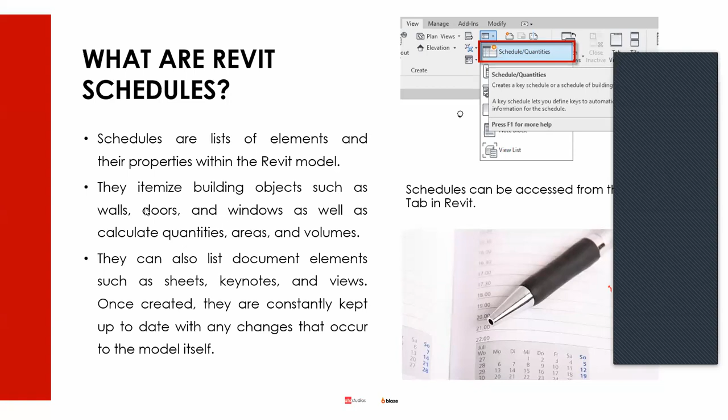So it's a bidirectional software, meaning that whatever you update anywhere, even if you update something on your schedule, it will update on your floor plan, on your elevation and all that. So that's basically the way schedules work in Revit. So basically in Revit, all building elements have information about their properties defined within the model. You also have the option to include additional information with any element.

So for example, by the time we start creating schedules, you notice that there are some parameters that you want to include in your schedule, but they don't come automatically within Revit. Revit allows you to create new parameters and add to your schedule. So that kind of makes it flexible. You can expand the parameters you have.

For example, let's say you want to generate the quantities of doors in a building, and then you want to indicate which of those doors have security features in them, which of them allow you to come in using biometric or access control and all those things. Such kind of parameters are not natively available in Revit, but with that feature of allowing you to create new parameters, you can easily add as many parameters as you want, and we'll look at all that by the time we start doing the practical.

So for example, doors have properties like size, material, fire rating, cost, and so on. All this information can be scheduled and quantified, and you can even add more to it. So when it comes to Revit, by the time we start the practical, you'll see that there are 6 major types of schedules in Revit, and each of them are tailored towards different use cases or purposes. The most popular and the most common one is what's called schedule and quantities.

And this is the most used schedule type in Revit, and it allows you to list and quantify all element category types. So you will use this to create your tabular views of doors, walls, quantities, areas, rooms, and so on. So basically, like the name suggests, schedule and quantities focuses on the quantity of elements. So for example, you want to find out how many doors you have in the building, how many windows you have in the building, those things. Of course, you can add more parameters, but the focus of this first type of schedule in Revit is on the quantities of elements.

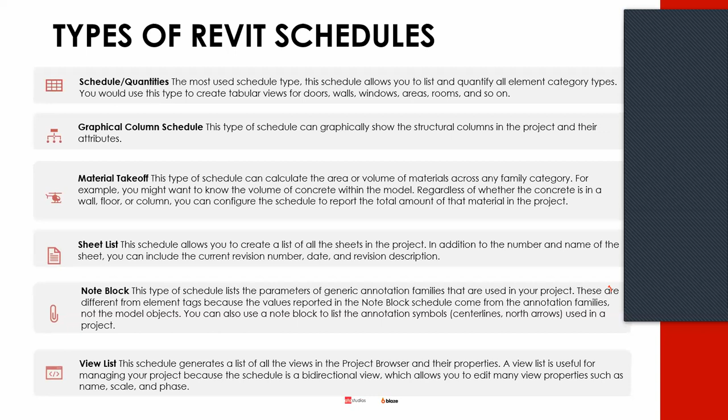So these are basically the types of schedules you find in Revit, and depending on what you want to itemize or schedule, you choose the type that you want to start with. And then each of the schedule types in Revit gives you the ability to select the related element properties that you can mix and match to track elements within the model.

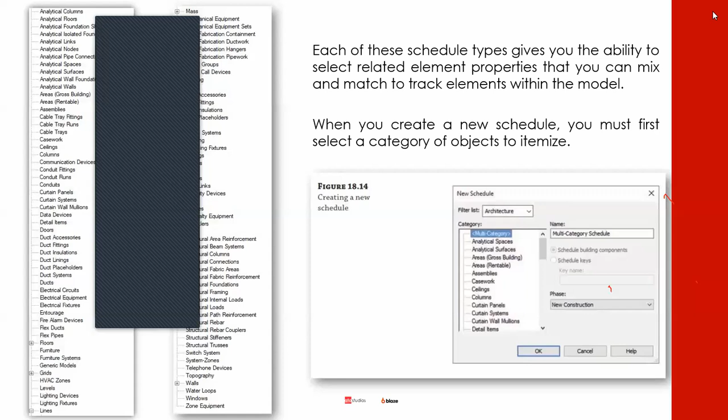So when you create a new schedule, you must first of all select the category. So basically, Revit has different categories of elements. A wall is a different category from a window in Revit. A window is different from a floor or a roof. So when you want to create a schedule in Revit, the first thing you have to decide is what category you choose. That category is what determines the parameters that you see subsequently.

So once you've chosen the category, you now start the actual scheduling, which presents you with different tabs depending on the type of schedule that you choose. I will explain all this in detail when I move into Revit, but you see different tabs. The first one is fields. This is where you select all the parameters that you want to add to your schedule.

The next one is filter. This allows you to filter out elements. For example, I want to generate a schedule showing all the doors on the first floor of a building. I can generate a schedule, filter by floor, and filter out all those doors that are not on the first floor, for example. And then you have the sorting and grouping. This is where you decide how you want to arrange, sort and group together those parameters in your schedule.

And then you have the formatting. Formatting is basically where you also decide how the schedule will look. For example, is it going to be aligned to the left or to the right? Do you want to rename some of the headers? Do you want to show the total and all those things?

Which I will still look at in detail when I move into Revit. And they also have the appearance, which is basically the graphical appearance of your schedule. What kind of font do you want to use for your text? What kind of line width do you want to use, and all those things? So those are basically the major tabs.

Then depending on the schedule type as well, if you are creating some special schedule like a room schedule, you also see one more tab called embedded schedule. This allows you to embed a schedule into another schedule. For example, you can create a room schedule and embed a furniture schedule inside it, and that will show you the furniture arrangements room by room across your project.

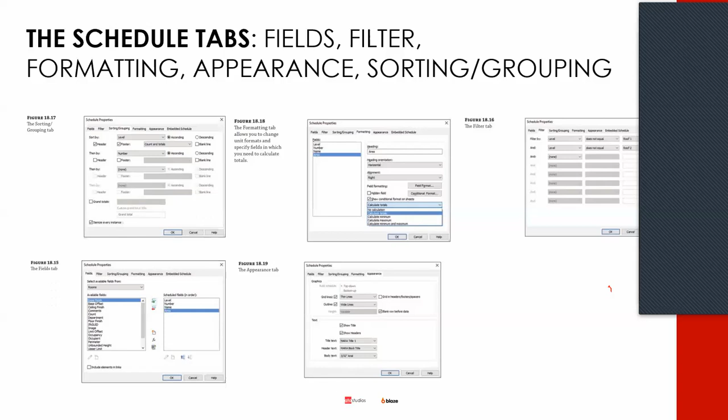So that's the embedded schedule, but this is only applicable to very few categories like rooms and spaces, things that you can embed geometric elements into. So those are the various tabs you find within a Revit schedule. And then finally, you also have what's called a multi-category schedule.

Like I mentioned earlier, before you start your schedule, you need to choose a category, which can be door, wall, window, column, casework. But there are some instances where you want one schedule to account for multiple categories of elements. Let's say you are procuring multiple categories of elements from the same manufacturer: your doors, your windows, your furniture, and your plumbing fittings. And you want to create a schedule showing all the elements you are procuring from that manufacturer.

In a case like that, you need to account for multiple categories of elements in the same schedule. That's where multi-category schedule comes in. When you want to create a schedule, that's usually the first option you see before the other categories. This type of schedule allows you to account for multiple categories, but the parameters you can add are much more limited because the same parameter needs to be available across all those different categories.

For example, every category in Revit has some parameters like keynotes, manufacturer, identity data, and so many of those kinds of things. Those are the kind of information that you can add to a multi-category schedule. And then you can even create more parameters to also add to it. But when I start demonstrating, you'll see some of these things.

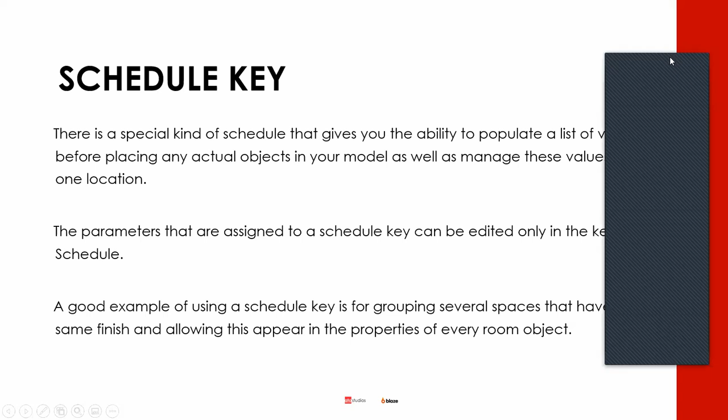And then you also have what's called a schedule key, which is a special kind of schedule that gives you the ability to populate a list of values before placing any actual objects in your model, as well as manage these values. People hardly use this. People that use this are mostly MEP engineers. For example, you want to control one schedule using another schedule. It actually takes some advanced Revit knowledge to make use of, but it's also one of the schedules you can generate in Revit.

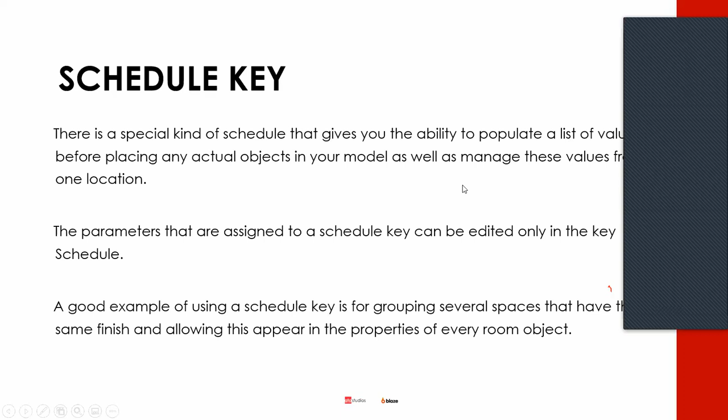And then, like I mentioned earlier, we have the embedded schedule. Embedded schedule basically allows you to embed a schedule into another one. For example, you can create a room schedule and embed furniture, or your doors and windows, to show how they are distributed across the spaces or rooms in a project. So that's basically what embedded schedule does.

That tab is only available when you create a room or space schedule, like I mentioned, and the embedded schedule tab allows you to associate another schedule of elements. The primary use of the embedded schedule is to create a schedule for spaces and associate elements from MEP-based systems, such as ducts, piping systems, electrical systems. Well, architects can also use it to show their furniture arrangements across their spaces and rooms.

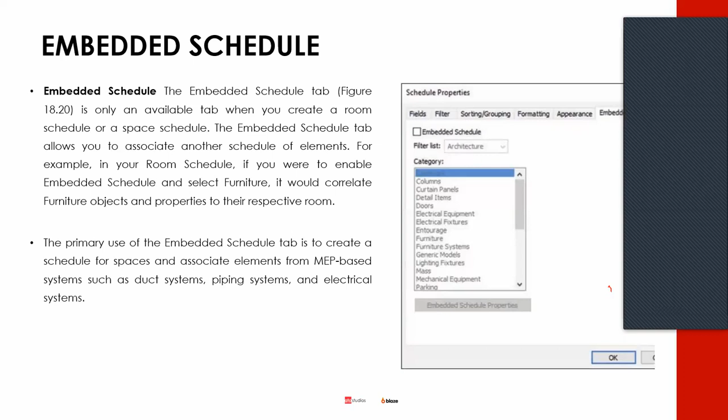And you also have what's called a legend. This is not really a schedule, but sometimes if you cannot show something properly using a schedule in Revit, you can use a legend. A legend is much more manual than a schedule. You're basically dragging elements and then typing.

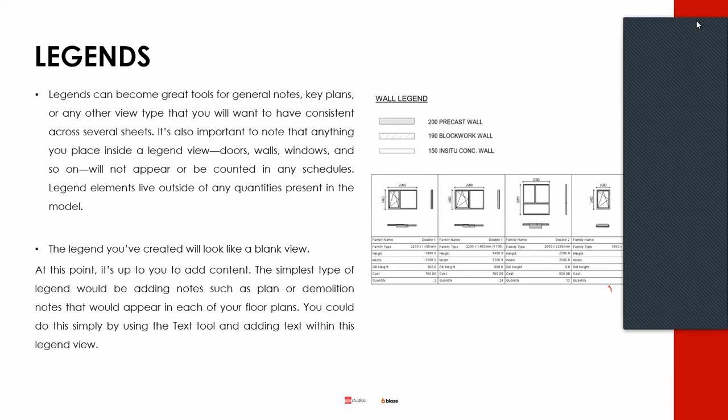For example, architects, in most of their documentation, usually show their door legend or window legend, showing the different types of doors and windows they have. This kind of presentation that you see here is done using a legend. It looks a bit similar to a schedule, but it's much more manual. A schedule is automatically updated, but for a legend, most of it you have to type as text.

So if there are some things you want to achieve that are not achievable using a schedule, then a legend becomes an alternative. For example, with MEP, M&E engineers, most times if you look at the documentation, the first thing you see is a legend showing all the icons, all the symbols and what they represent, all the switches, the sockets, the ducts and whatnot. Those kinds of things you can easily do in Revit using a legend.

And of course, one last thing about schedules in Revit is the fact that you can reuse them. Once you've created a schedule for one project, you can easily copy it across your projects. What that does is that it will bring in all the properties of that schedule into a new project, but the quantities that you're seeing will come from the project, while the properties will come from wherever you

copied it from. So once you've finalized and perfected one schedule in a project, you can easily copy it and replicate. It will just bring in all the settings you've done, because some of those settings can take time to create. So it just serves as a template that you can easily copy and paste in different projects.

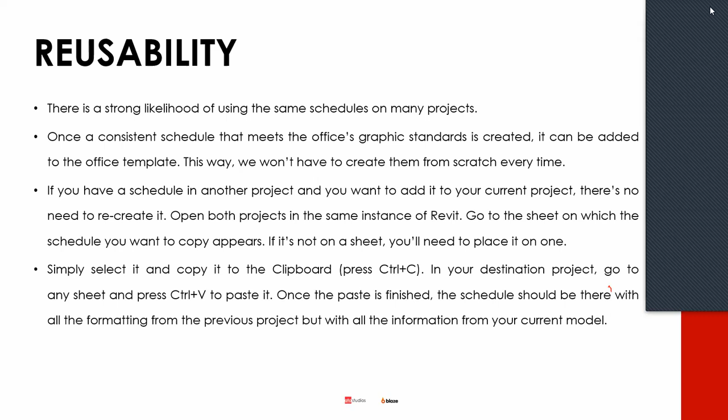So at this point, I'll just go into Revit and begin to show some of these things.

So, I believe you can see my screen. Can you see my screen? Yes, we can see it. The basic sample project. Yes. Okay, fine. Yes, they can see it. Yes, they can see it. So I understand. Okay, so

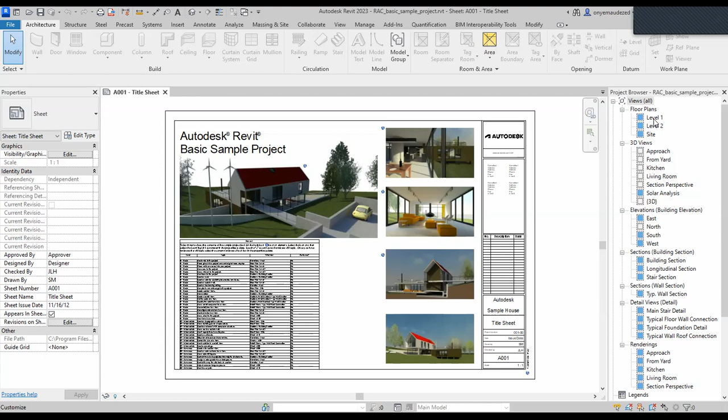before I go into the actual schedule, I'll just quickly run through the Revit interface. I'm using Revit 2023, which is the latest version of Revit that they just released last month or thereabouts. So when you launch Revit, even before you open a project, the first thing you see is your home page. From here, you will see your recent projects and your recent families.

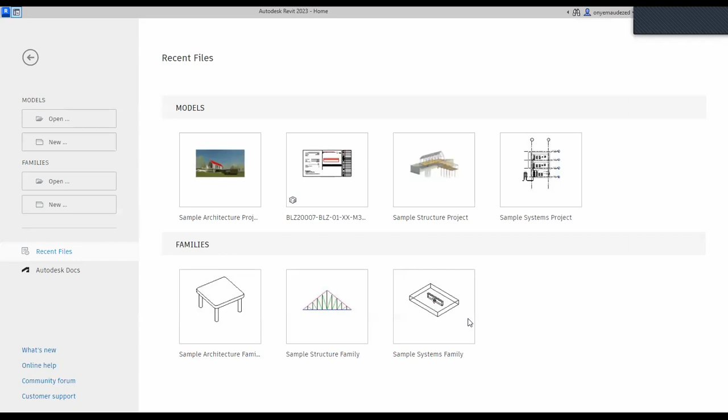So when it comes to Revit, there's something called families and something called projects. A project is comprised of multiple families. For example, all the components you bring into your project, like doors and windows, are called component families. They are created outside of the project, and then you bring them into your project. So this is where you see all the recent families that you've worked on, and this is where you see your recent projects.

You can open an existing project or create a new one. You can open an existing family or create a new one. And then if you have the license, Autodesk Docs basically allows you to collaborate with other people on the project remotely without having to be in the same location. So that's what Autodesk Docs here is for.

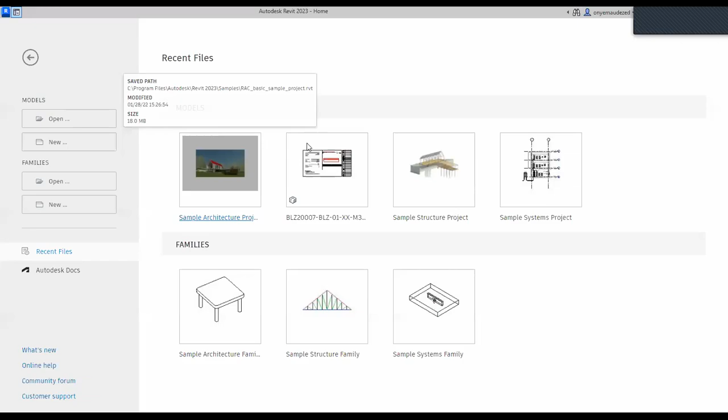So when you open a project, you now have this very busy looking interface. I'll just summarize this. At the top here is what you call your quick access toolbar. This is where you see the tools used very frequently. You can add or remove them. If you click on this drop down, you can check and uncheck, or click on customize to customize more things. And if you want to add a tool, you can right click on any tool on what's called the ribbon, and add it to your quick access toolbar. So that's the first thing that you find here.

Below it, you have what's called your ribbon. The ribbon is broken down into different tabs, and the tabs are broken down into what's called panels. Each panel is a collection of similar tools. For example, we have the architecture tab, which is where architects spend most of their time. Under the architecture tab, you have the build panel, the circulation panel, the model panel, and the room and area panel. The build panel is where you see all the tools you use to design a building. That's why it's called a build panel.

So that's basically a tab. They have the architecture tab for architects. You have the structure tab for structural engineers, with the panels under it. You have the steel tab for people that are into steel fabrication, and the precast tab; these three tabs are mostly for structural engineers. And you have the systems tab for M&E engineers. So you can see,

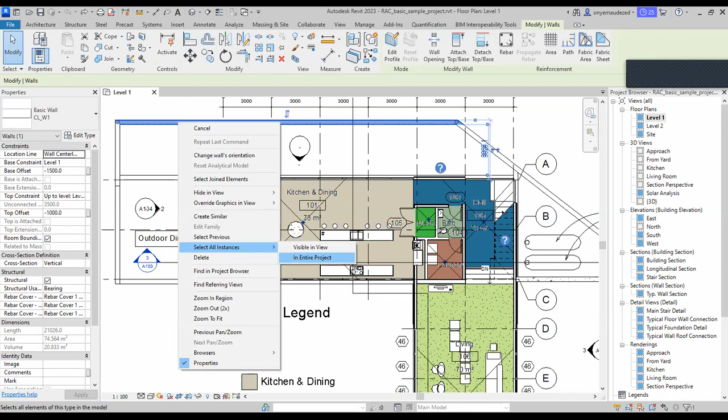That's the wall type, right? So if I click on this one and I say select all the instances in the entire project, if you check the count of this, you see that I have 6 of it in this project. If you check filter, you see that I have 6 of this. So now if I click on this one and I change anything from here, this will affect only this particular instance of this wall. And that's why it's called instance property.

But by the time I click on edit type, which you see beside this, whatever you're changing from here now is called type properties. So because I have 6 instances of this wall in the project, anything I change here will affect the 6 of them. In fact, if I add more later, it automatically affects it as long as you can see the type CL_W1. I can even switch to a different type from here, but whatever I'm changing here affects the entire type. So if you have 100 instances of the elements in your project, it will affect all of them.

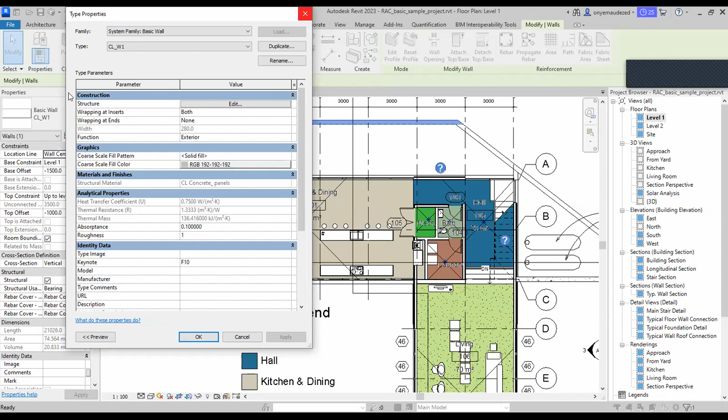So those 3 things are what make up your property browser. You have the type selector, you have the instance properties, and you have the type properties. And then another important panel you see is your project browser. Just see this as in your Windows, just like your file explorer. This is basically where you find all the view types in Revit.

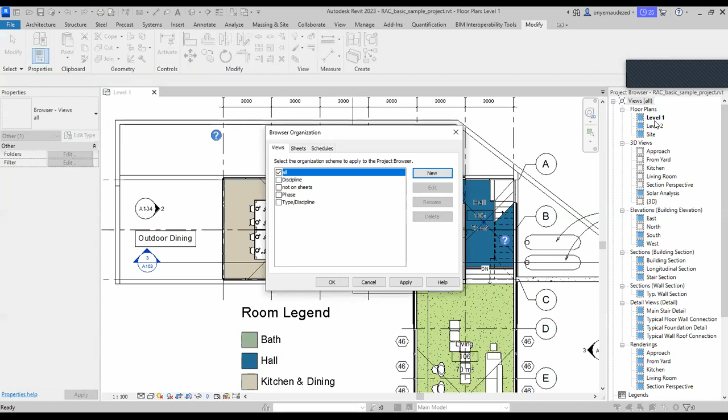So depending on how it's arranged, you can see under here that the view type is views in bracket all. So if I click on browser organization, which is kind of advanced, you see that you can arrange by discipline, you can arrange by phase, you can arrange by type, and then by discipline. But this default one is usually okay. So from here now, you can see that I have floor plans. You can see all the floor plan views I have. I have 3D views.

And then recently in Revit, these ones in blue, they just added this feature in 2023. These ones in blue tell you that they're already placed on the sheet. So the ones that are not highlighted in blue means that they're not placed on a sheet yet.

So basically, these are all the 3D views I have. These are all the elevation views I have. These are all the section views. You can see that even the sections have different types: building section, wall section, and all that. If you go back to your view type and want to create a section, you can choose the type of section you want to create, but that's a bit advanced. But basically, you can see all the section types you have.

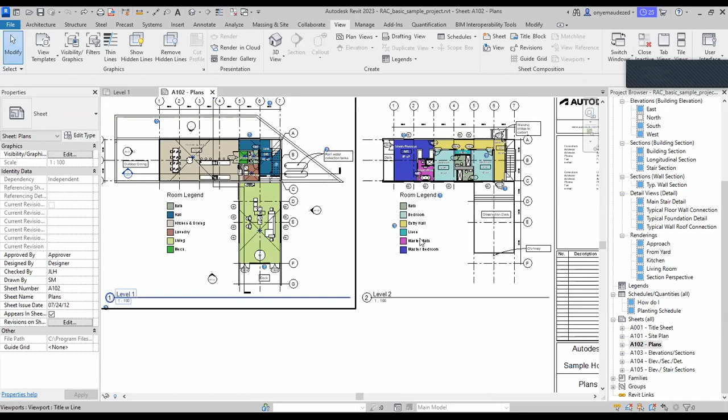You can see your detailed views, even your rendered views. If I click on this now, you can see renderings have been done on this. So all those view types are arranged under the project browser. And then you can see the legends, the schedules, the sheets. For example, if I click on these plans, you see that these are multiple views. This is your ground floor and the first floor plan. These are two views that have been placed on a sheet, which is why I was differentiating.

So if you are creating a sheet list, it will be listing all the sheets you have on the project. But if you are creating a view list, it will be listing out all the views you have on your project. These views in blue are the ones that have been placed on a sheet. If you want to print this out for a project site, I'll be printing out the sheets and not the views, because these have been scaled down.

If I click on this view now, you see that the scale is 1 to 100. I can change the scale from here to something else. If I put it to scale 1 to 200, you see that it automatically resizes on the sheet, right? So that's basically how the sheets and the views work in Revit. All those things are arranged under the project browser. You can see all the sheets and the families.

Earlier I mentioned that a project is comprised of multiple families. When you expand the families, you begin to see all the kinds of families, the categories, which is very important. When you want to create a schedule, you need to choose what category you want to start with. For example, you can see doors. If I expand these doors, you see all the door types that I have in this project. So this is a category called door. Under the door, you have types.

So all these things are arranged under your project browser, under the family tree. If you are familiar with Navisworks, you know that Navisworks also has a similar thing called family tree. That's where all those categories you see in Navisworks are able to belong to the right category, because Revit has already placed them under the right category. And that's the beauty of BIM software.

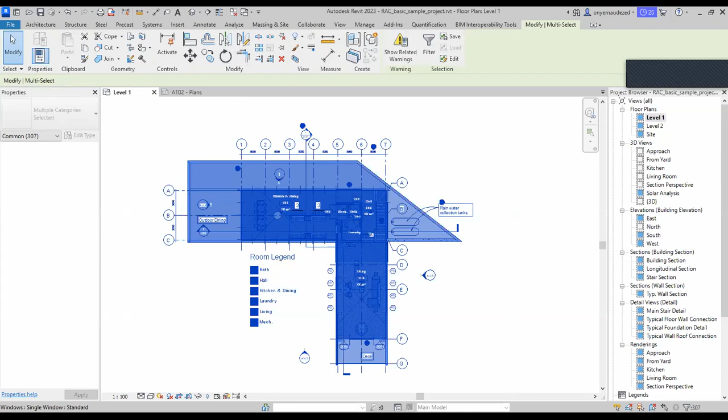And they also have this final element that looks like a funnel. So when you select multiple things, it will tell you the amount of things I've selected. So you see that just by highlighting over my screen now, I've selected 307 elements. So this funnel just gives you the number. But if you now want to find out the breakdown, you also see another funnel that is up here.

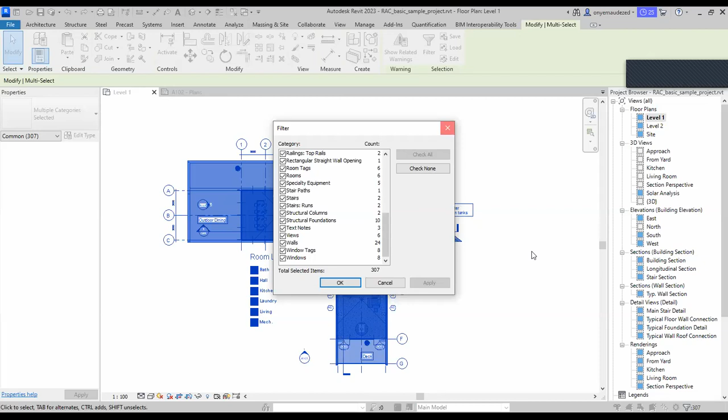If you now click on this one, which is the filter, it will now break down what you selected. So just by scrolling over my screen now, I've selected room separation lines, 4 of them, 2 casework, color fill legend, and all. You can see the way it's all broken down. And by the time you add it up, it gives you 307 elements. So those are just the basic summary of the Revit interface.

One last thing here, up here too, is where you manage your license and all that. So for example, because I didn't connect to internet before I opened my Revit, and I've not opened my Revit for the past 5 days, it's already counting down. Even though I'm using a genuine license, if you don't connect to internet, automatically it will place you in a 30 days trial. So once I connect to internet before opening Revit, this countdown will disappear.

But this is basically where you can change your account. If I go to here, you can see my account details and I can change my license and all that. And they also have the App Store where you can download some plugins and whatnot. So that's basically the summary of the Revit interface.

So at this point now, I'll go into the Revit schedule proper. So for you to create schedules in Revit, from the ribbon, you go to the View tab. The View tab is where you create different types of views. And interestingly, a schedule is just another view type in Revit. The same way you look at your project through a floor plan, which is graphical, or an elevation or 3D, a schedule is just another way to look at it.

This time around, you're looking at it in a tabular view, so the same things you're seeing here are the same things you have on your schedule. And which is why I mentioned earlier that Revit is bidirectional. Anything you change on the floor plan will also change on the schedule. Anything you change on the schedule will update on the floor plan. So to Revit, it's just another view type. Which is why if you go to the View tab under the Create panel, you see it beside all these plans.

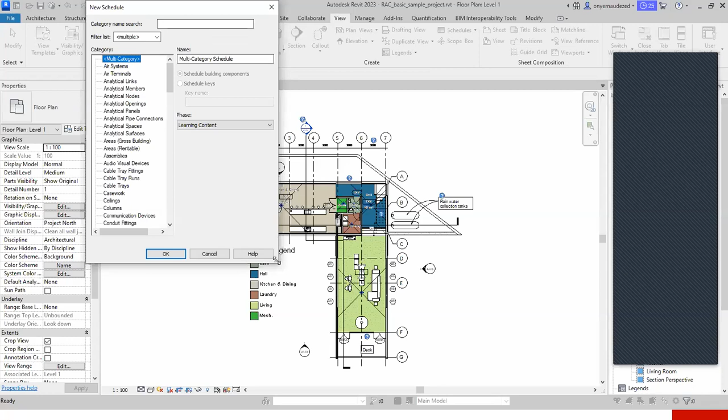Once you click on that, you now see this New Schedule dialog on the screen. This is basically where you choose the category. Depending on the discipline, you can filter by discipline. Since the wall is an architectural element, or I'm not interested in M&E elements for now, I can uncheck these ones to reduce the categories so that I don't have to scroll too much. As I'm unchecking, you see that it's reducing. So I can reduce it to just architecture. I don't have infrastructure here. So this is now just architectural categories, and you can see that architecture alone has so many categories.

Now, what I want to create is a wall schedule, so I have to look for Walls. I also need to be careful, because if you click on this plus sign, you have Wall Sweep under it. If you click Wall Sweep, that means you're just calculating the sweeps that you have on your wall and not the actual wall. So make sure that you click on Walls. You can also see the multi-category schedule I mentioned, which is the first one here. I'll show that if time permits later.

Once you've chosen the category, you also need to look at these things here. Since there's no wall schedule yet in this project, the name will automatically use the category and add schedule after it. If you have one existing before, it might become Wall Schedule 2. But if you want to rename it, you can rename it from here.

And then you also have these 2 options, schedule building components or schedule keys. In the introduction I also mentioned schedule keys. Most times the people that use this are electrical engineers. It allows you to control a different schedule using the properties from this schedule. So it's kind of advanced. So make sure that you choose schedule building components.

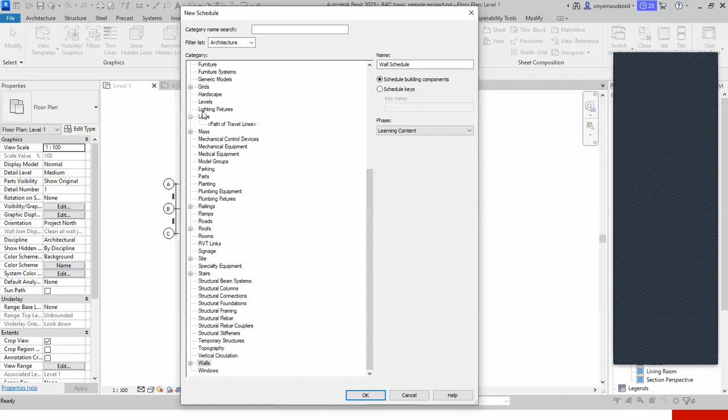This is now when Revit will bring up these tabs. Depending on the category you choose, when I choose a room schedule or area schedule, I will see one more tab here called Embedded Schedule. Maybe I'll also demonstrate that later. But now these are the 5 tabs that you see, and I'll explain how all these tabs work in a bit. Basically, depending on the category you choose, these are the properties, or parameters, as they're called in Revit. These are the existing parameters that are already in the project for that particular category.

If I choose a window, the properties I will see here will be properties of the windows in the project. If I choose a door, I will see the properties of a door. Because I've chosen a wall, these are the properties of a wall, and these are the ones that come with Revit natively. I will show you how to add more if what you want in your schedule is not here already. So this first tab, called Fields, is where you choose the various parameters you want to add. So let's say, for example, let me reference one that I already did, the one you sent to me.

Okay. So let's say, for example, the fields I want to add to this. The first one I have is what's called family and types, which basically tells you the family and the type of the wall. So the other time we're talking about CLW1, or you might have 150 mm wall, 230 mm wall around it. So this is what shows you the family and type.

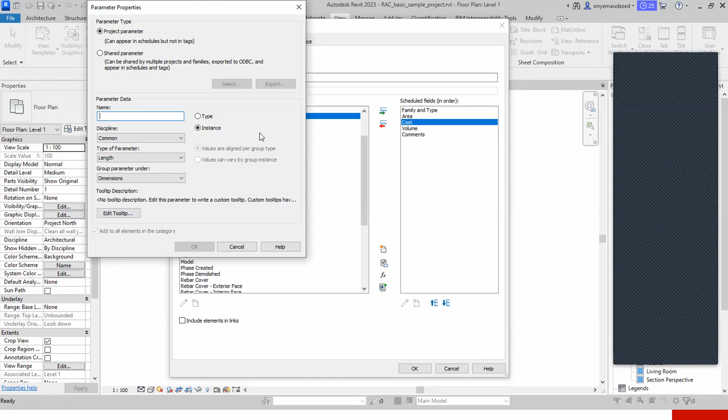So for us to do that now, if I now go to this new parameter, you can see this is where you can create a new project parameter. So this is very important that you understand how this actually works. So for example, what I want to now be able to calculate here is the total cost that works with the area of the wall, right? So now this is the name I can give it. I can call it total cost.

Now, if you choose here, you can see that by the side of it, you have 2 options. This can be type, or this can be instance. So if you remember when I was talking about the properties palette or properties browser, I mentioned that there are 2 types of parameters in Revit. You have what is called the instance parameters, and what is called the type parameter. So how do you want this parameter to behave? Do you want it to change on a wall-to-wall basis, instance by instance basis, or do you want it to change on a type by type basis?

So this total cost now, you want it to be reflective of an individual wall. Even if you have a 230 mm wall on your project, you can have one that the height is 1.5 meters, you can have another one that the height is 6 meters. So you want to be able to create a parameter that changes dependent on the height or the area of that wall. So in this case, I can make it an instance parameter rather, meaning that I'll be able to manipulate this parameter on an element by element basis.

And now, what is the discipline of this? Is it something that has to do with electrical, energy, HVAC, infrastructure, piping? It doesn't have anything to do with any of this. So you can just leave it as common. And now, what type of parameter is this? This has to do with cost, right? So I can put this as currency. Okay.

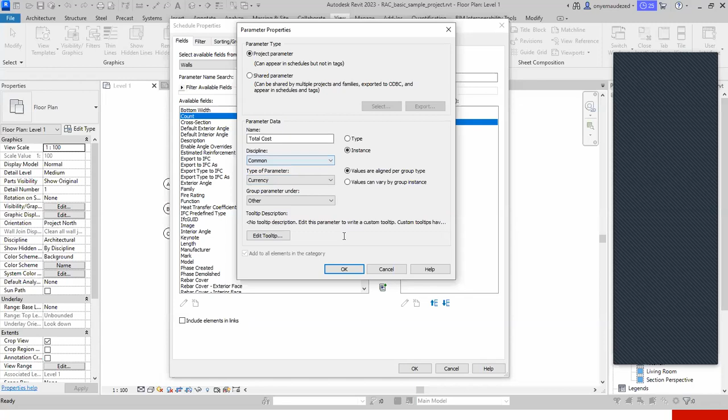So basically, once you finish doing this, when you click this now, you notice that this is now a new parameter. But what we've actually done now is just add a new parameter. What I actually want to show is how to derive a calculated parameter. In this new Revit, they also allow you to bring in parameters. Maybe you can have a parameter file somewhere on the cloud and bring it to your project. So this one will connect to the internet. This is just a new feature they added.

But the next one I have there is what's called calculated parameter, which is the one I actually need for this. So I'll just delete this other one that I did before. If you want to delete, you can see this delete, but you can only delete the one that you added by yourself. You can see that these ones, because they are natively in Revit, you cannot delete. What you can only do is remove it. So if I want to remove this area, I simply click on this red button here and it will be removed from my schedule. It will go back into the project.

And you can also rearrange. If I want the area to come before the family and type, for example, I can move it up. So that's basically what this does. So what I also want to demonstrate is the calculated parameter. The way this calculated parameter works is that you have an existing parameter and you want to use it to derive a new one. For example, we already have a parameter in Revit called cost, but that cost doesn't work with the area of the walls. We want to create a parameter that adjusts based on the area of the wall. So that's the one I was actually supposed to demonstrate, which I can call total cost.

And then now it's a formula. You also need to be sure that the discipline is correct and the type is correct. So the type here is currency, right? So what's the formula? The formula is that I want to multiply the unit cost for your wall times the area. So for example, let's say your unit cost for a wall is 500 naira per meter square. That's the unit cost for your wall. So that unit cost is what I will multiply by area to derive the total cost of the wall.

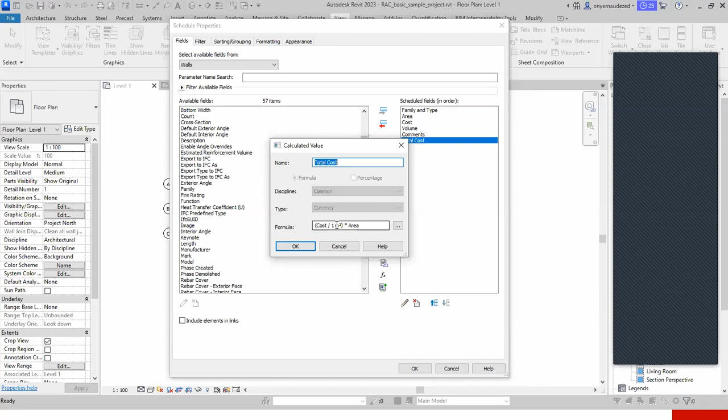If I click on edit now, go back there, I see that what Revit has done is that it divided this by 1 meter square before it multiplied it by area. So that's how it kind of neutralizes this. This is very important whenever you are creating calculated parameters in Revit. So now we have a new parameter called total cost, and this is actually derived from two existing parameters, which are area and cost, right? So this is a new column.

You can even have one last one called combined parameters. This one is similar to calculated, but it doesn't calculate. What it does is that it just lists out. For example, if I want to call out the area and the cost of a wall, this is just a demonstration. If I do this now, Revit will just tell me the cost of this wall is this, and if I add a separator, it will just write it out. It's not calculating anything. It's just text that is written out. It's just combining the two parameters. So that's one last thing here.

So you see that there's a lot going on in these fields, because this is basically what determines what will show up in your schedule. And then you can even select fields from the project information. For example, in your schedule you want to show the client's name or the project number and all those kinds of things. If you click on select available fields from, you can choose information from the project information. The initial one was coming from the category that you chose, which is walls, right? You can add project information to your schedule as well.

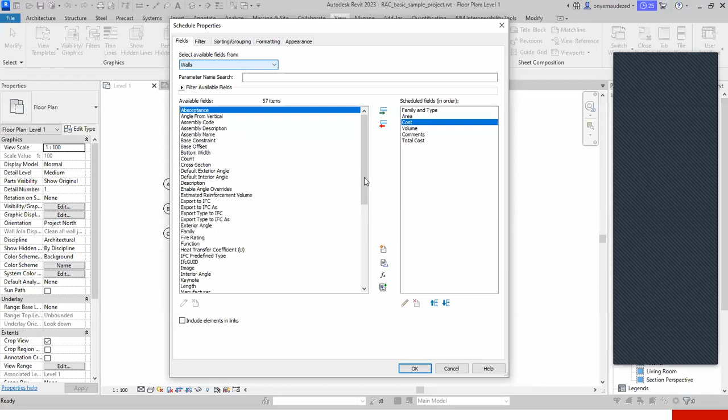And then if you have links in your project, you can even include elements from links. So let's say this is an architectural model, and I have multiple buildings on the same project, and I want to count all the walls in all those buildings. Let's say you're working on an estate project and you have different building typologies, all linked into the site model, and you want to create a wall schedule that shows all the walls in the estate. Then I can include elements in links and Revit will count all the walls across all the linked files. In this case, we don't have that, so I don't need to check this.

So I think I've explained everything. You see that this field is very important. This is where you choose your parameters, the columns that show up on your schedule. This is where you can add new parameters, add from the cloud, calculate using existing parameters, combine existing parameters and whatnot. At the end of the day, these ones that you have here as scheduled fields are what will show up in your schedule eventually. That's the first tab. And the second one I have here is filter.

This is basically where you filter things. Let's say you want to show only curtain walls, or you want to show all the walls that are not curtain walls. Let's say on your curtain walls you already have comments that you used to identify them as curtain walls. I can easily come here and say filter by comments, then say does not contain curtain wall. So for every curtain wall in your project, you have added this comment. Now when you say comment does not contain curtain wall, Revit will filter off all the walls that contain this. So this is just a way to filter.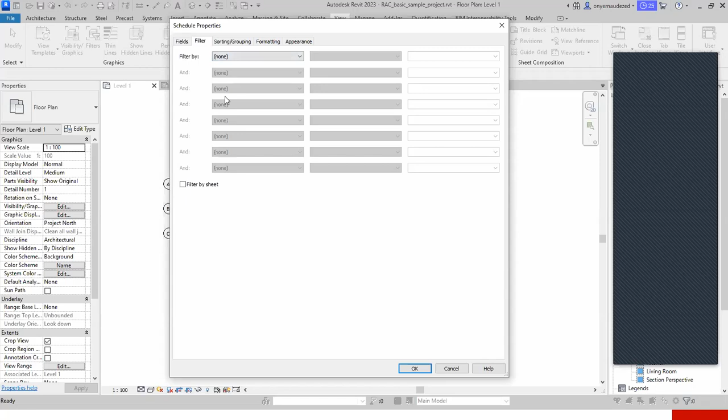And then the next tab you have is the sorting and grouping tab. So this basically determines how you sort and group your elements. You can add a parameter to your schedule just because you want to use it to sort, but there's a way you can make it not show in your schedule eventually, which I'll also explain in a bit.

So in this case, now let's say we want to sort these walls. We want to arrange them, first of all, by their family and type. So once you click on this now, you can see that you can either choose to add a header for each group and also add a footer to it. So let's say I add a header here now, and then I add a footer as well, showing us the count and totals, for example. You can even add a blank line in between different groups.

So you see that there are two things going on here, the grouping and the sorting, the way they are grouped together and the way they are also arranged within the groups. That's basically what happens here. So I can choose to add a blank line and whatnot. So after sorting by family and type, how else do I want to sort this? So I can choose, for example, let's say I add one more parameter.

It's connected. Okay. So I just wanted to demonstrate how you can add. I think I didn't add counts before. Just add counts. Yes. For example, let's say I want to add this function just because I want to use it to sort. So if I come to my sorting and grouping now, I can say after the family and type.

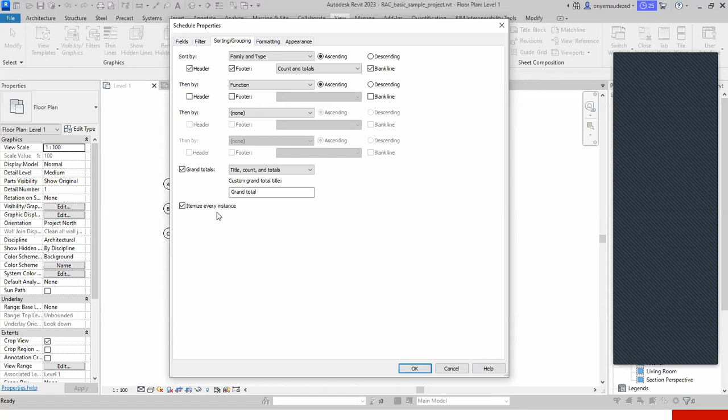So if you don't want that, for example, you just want to create a schedule just summarizing, let's say you have 3 types of doors in your project. You can create a schedule showing that this particular door type, you have 50 of it. This particular door type, you have 100 of it. This particular door type, you have 200. You can choose to not itemize every instance.

So in that case, that's where this count becomes important. But in this case, since you're itemizing every instance, you might just remove this count. There's no need for it since you're already itemizing, because the count will just be 1 for all of them, which doesn't make any sense, right? So that's basically sorting and grouping.

And then the formatting is where you set up some other things. For example, the heading. This family and type, let's say it's too long on my schedule as a column, and I want it to be shorter, or for some reason I don't want to show it as family and type. I can change the heading name from here. I can call it something like type, for example, which is shorter. You can rename it. So Revit knows that this is referring to this parameter called family and type, but on your schedule, it shows whatever you've named it.

And then you also have this heading orientation. This heading orientation becomes visible when you place the schedule on a sheet. So you can make the heading of that particular column vertical or horizontal. Most times when you finish doing your schedule, you won't notice it until you place it on a sheet. Then it becomes visible.

And then this has to do with alignment. So most times in your typical Excel, you notice that the first column is always aligned to the left and the rest are aligned to the right. So I can select all these columns now and tell Revit to align them to the right. Right. So that's some of the things you do under.

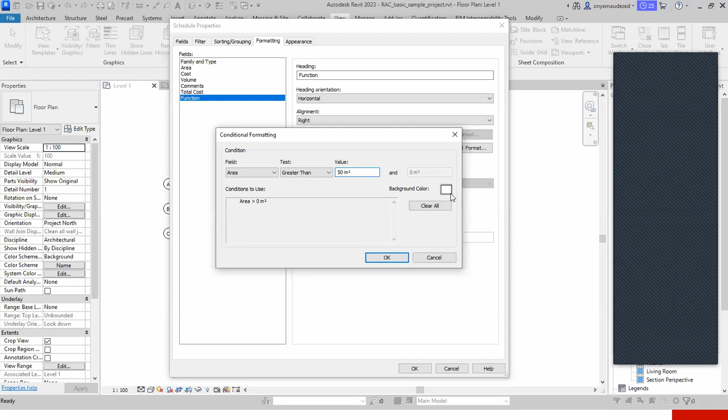That's basically the way conditional formatting works in Revit. So you're just setting a condition and you're telling Revit that whatever satisfies this condition, format it this way for me. That is what conditional formatting does for you. So if we create this schedule now, if we see any cell that is red, that means that wall is more than 50 square meters.

And then also you have calculate totals. So this total is also important to mention. For example, I want to be able to calculate the total wall area for that column. So this one now has to do with that particular column, not the entire schedule. So for this area, I can tell Revit to calculate the total area for my walls. The same thing with the cost. I want to know the total cost. I want to know the total volume. So this only applies to things that are either area or length and all that.

If I click on comments now, you see that it's grayed out because you can't calculate total comments. And cost too, I want to know the total cost. These rates, I don't think you need to calculate totals. No calculation, yeah. So what I want to mention here is that if I come to this area and tell it to calculate totals, but then under sorting and grouping, you didn't check grand totals, Revit will not calculate anything, because this is what affects the entire schedule. This sorting and grouping affects the entire schedule, but this formatting affects just a column.

So if you've already unchecked this one that affects the entire schedule, and I now come and tell Revit to calculate, grand totals overrides this calculation here. So it's important to mention that sometimes people will come here to say calculate totals, and then they will forget to check grand totals, and they don't see any totals. They'll be confused: why is it not showing any total? That's because this actually controls this. It overrides it. And then of course you have the final one, which is appearance.

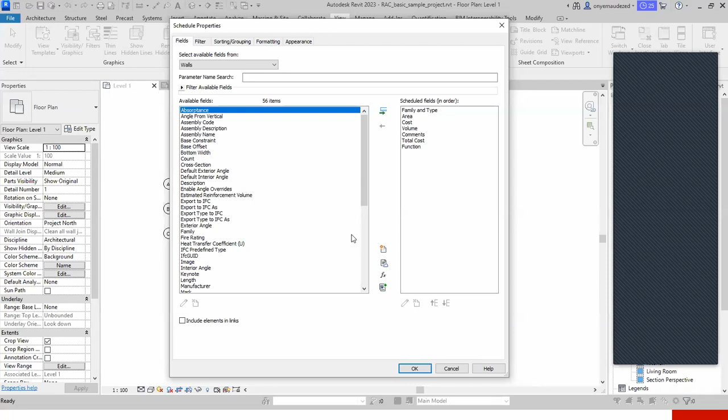Just graphics. So once you understand how these 5 tabs work: we talked about the fields, which is where you choose all your parameters, calculate, and all those things. The filter, which is where you filter off what you don't want. Sorting and grouping, which is how you arrange and sort your parameters. Formatting, where you do some other formatting of the individual columns. And then appearance, which is the graphical appearance of the entire schedule.

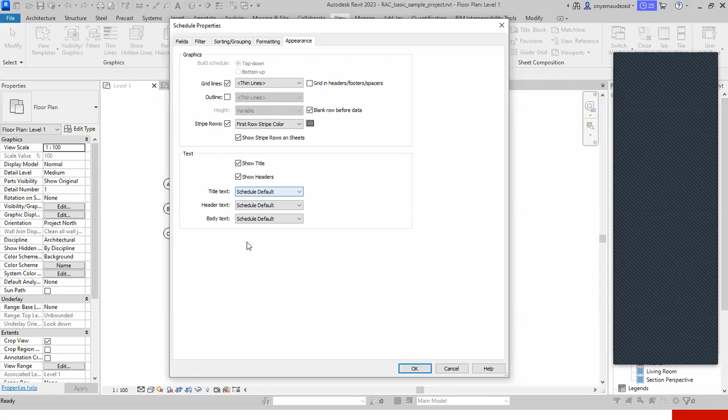Once you've done all that, you click OK. And you see everything I've been setting so far. This is the way it now appears. You can see now we have basic wall. The reason I'm seeing this header here is because if I go back to my sorting and grouping, you can see all those tabs here too from your properties palette. Under this sort by family and type, I have this header. That's why it's calling out this header.

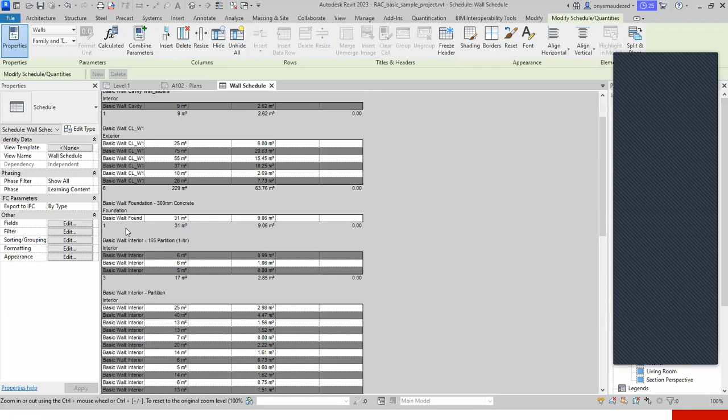So now it's telling me that this is actually wall cavity. And the reason you are seeing interior under it is because I told you that after arranging by the family and type, you should arrange by the function. So now you have this CLW1 and they are all external walls. The reason I see exterior, interior, and all that is because you can see interior, exterior, foundation. You have retaining walls here and all that.

Let me go back to the floor plan. Okay, this is a sheet. The reason you are seeing those things is because if you click on this one now and go to the function, a type property, you see that the function is exterior. If I change this to interior, for example, which is not true, you can see this is CLW1, and I change it to interior. If you go back to your wall schedule, you notice that CLW1 walls are now all interior.

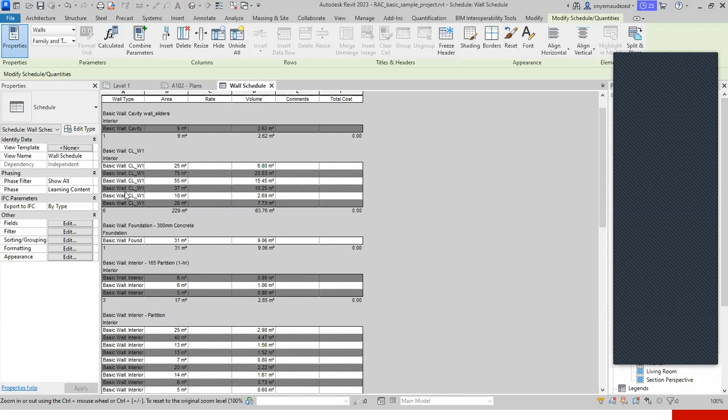So you see that this is bidirectional. Once you change anything on your floor plan, it updates automatically. Imagine working in AutoCAD and I wanted to update all this. I have to manually input all those things. Revit is very intelligent, it's bidirectional. So I will just undo. If I click Ctrl Z, undo what I did, and come back to my schedule, you notice that it changed back to exterior.

Now, if you look at the way the schedule is arranged, I have a header for the first arrangement, which is family and type. I have a header for the second one, which is function. If I go back to sorting and grouping, uncheck this header, and click OK, you notice that it doesn't show all those interior, exterior, and so on. You're the one creating the schedule; you determine how you want it.

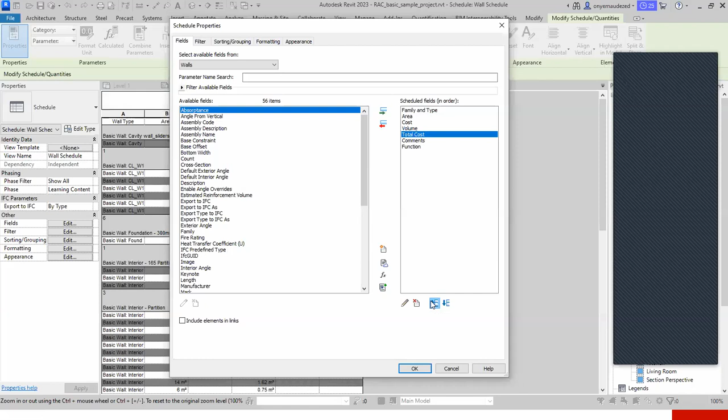Now, the interesting part is that we've not set the rates. Because we've not set the rates, there's no total cost. I also want these side by side so that it's clear. If I go back to my fields, I can move this total cost to come after the cost, which is actually the rates. Now, the two fields are blank. And if you look at these comments, because I've used it to filter, there's no comment yet, so I don't need it to show.

I can go back to my formatting. In formatting, this comments field I can make a hidden field because it's just a blank column. It's not doing anything, just occupying space. So now the ones I want to show are the rate and the total cost, which I believe are most important to quantity surveyors. Now, let's say the rate for this wall type, this CLW1, let me just show the function again, the header.

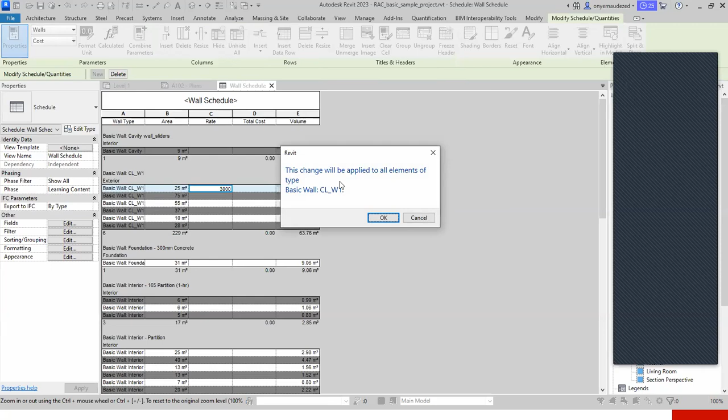So let's say this is an exterior one. Now let's set the rate. I don't know the rates, I'm not a quantity surveyor anymore. So let's say this is 3,000 per meter square. That's the rate. Now, once I do this, Revit will give me a warning because this is actually affecting the entire type, right? So once I click OK, you see what has happened.

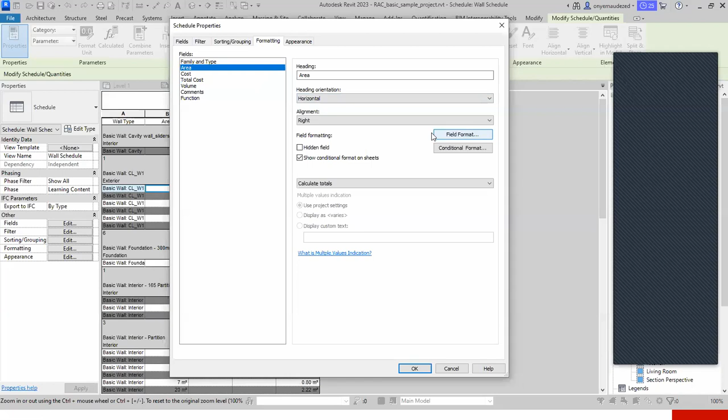The total cost you're seeing here now is based on the area of this wall. The area of this wall is 25 meters square. And I think I skipped one last thing when I was talking about formatting, which is the field format. If I go back to the area, for example, you have this field format. It uses the project settings, so depending on the units you set on your project, that determines how it shows.

So for this area, for example, I want it to show 2 decimal places so I know the exact value, to be more precise. So if I go to the rounding, I'll click on 2 decimal places. I can even choose to show the unit symbol if I want, and then I click OK. Now if I come here, I can see the precise area. So instead of 25, which was 0 decimal places, it's now 2 decimal places.

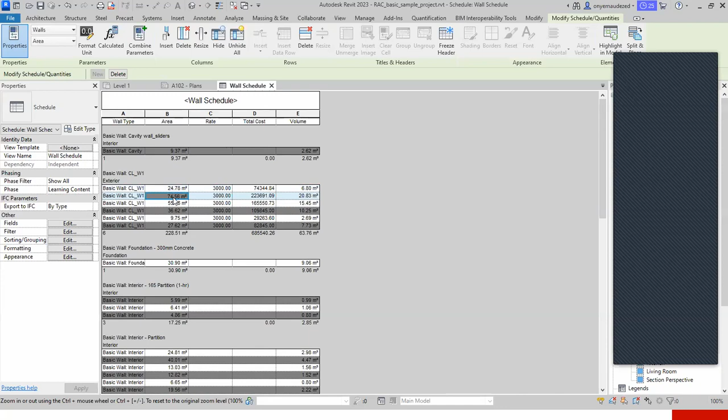So if you multiply this 24.78 by 3,000, which is the rate, it will give you the total cost of this particular wall. So this is now dependent on the area of the wall, right? So this 74.56 times 3,000. So let's say the rate of this one is 3,000, and this is the interior wall. If I set the rate for this, let's say this one is 2.5 or whatever. Of course, as the quantity surveyor, this is where you get the market rates, take a Revit model, fill in all these values, and you see your schedule begin to come out.

So this is a foundation wall. Let's say it's more expensive, 3.5 for example. However many walls of this type you have on the project, it should be updating, because this rate is a type parameter. If you don't want to do it from the schedule, go to a floor plan or a view, click on this wall and go to edit type, you see cost. You can see the 3,000 is already here. I did it from the schedule, now it's showing on the floor plan.

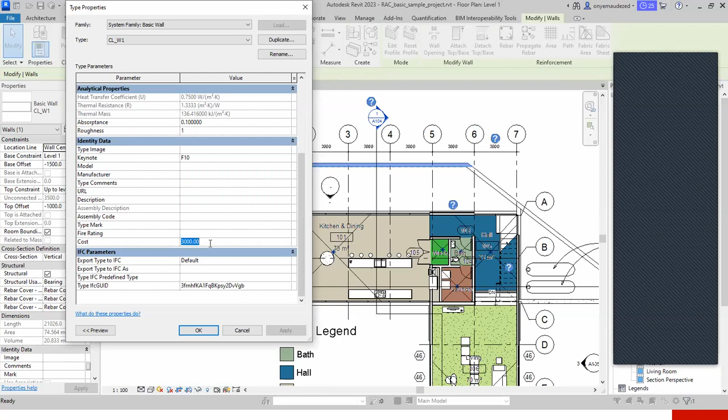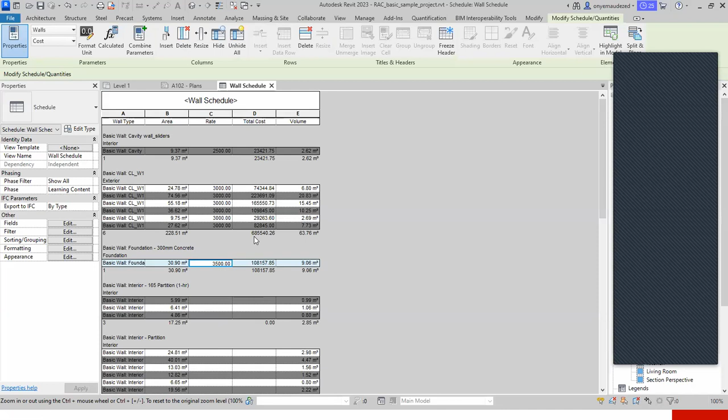So that's Revit for you. This is just a different view. You're not working outside of the 3D model, you're working on the same information, extracting it and reducing it to a spreadsheet. That's the way Revit works. It's not like AutoCAD where you're drawing lines and typing text. It's extracting the information you have in your 3D model. And that's basically what information is all about in BIM. You extract information from the 3D model into spreadsheets, and decide how to show it, the formatting, sorting, grouping and all that.

Let's say this interior is the same rate as the other one, which is 2.5. I just type 2.5 here, click OK, and this is interior as well.

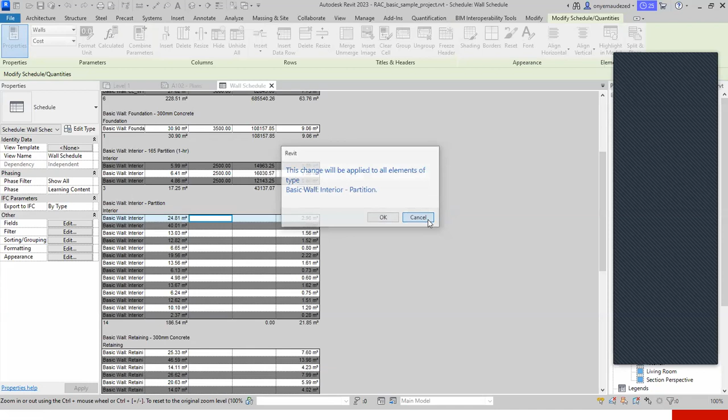So I was basically trying to populate all the rates and the total cost. This is where experience comes in. The software won't do everything for you; it's just a tool that aids your work. You are the quantity surveyor, you get the up-to-date market rates and you fill all these in. So let's say this is 2.5, like I did the other time.

And then they will ask you, as you fill it up, because it's a type property, to affect all the instances of that particular wall type. So this one is the retaining wall. Let's say it's also the same rate as the foundation wall, or it's even more expensive. Let's say it's 4,000 because it's usually thicker than a normal wall. So you can see as you fill that up, it's coming. Let's say this is 3,000.

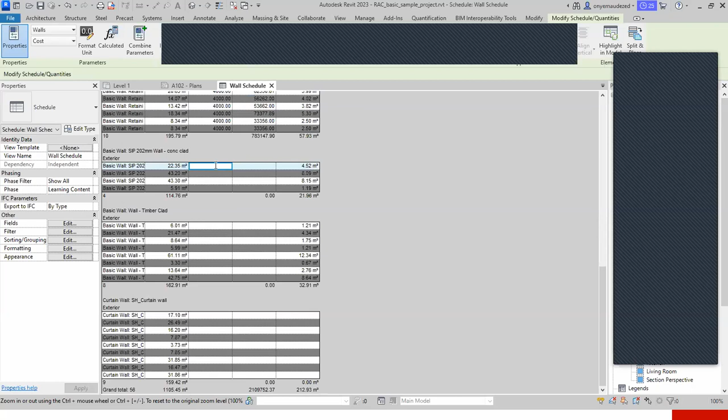And then exterior 3,000. So these are all wall types, right? As you fill them up, you can see that total cost is updating automatically. Everything is updating. Exterior, let's just make this slightly different. Now this one is 3,200 or whatever. So once you do this, you see that you have created a schedule. So from here, what you are seeing is you have one interior wall, you have

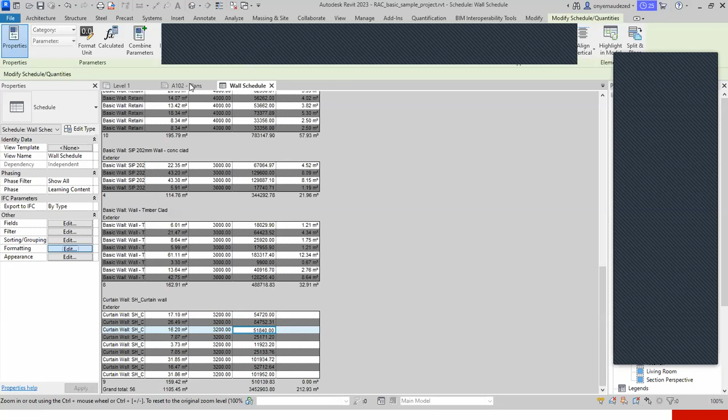those totals, and then in total, the total area of all the walls in this project. So imagine if you have to calculate all these figures manually. I'm sure it will not even be as accurate as this, because this automatically updates. If I delete a wall now, all these numbers will reflect it. And because this is just the rate, I don't want to calculate total rates. That's why, when I was doing formatting, I did not add calculate totals under this. That's why that particular column does not show.

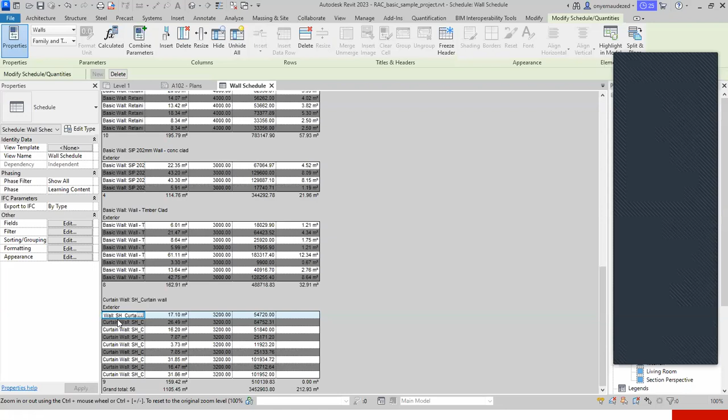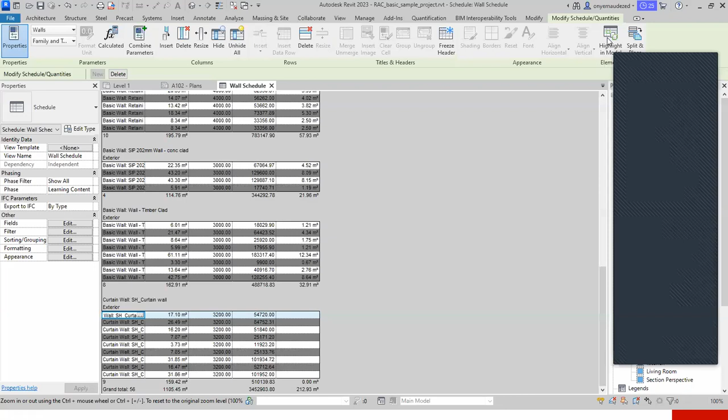Okay. So now there are also some interesting things. Now I want to trace this wall. I want to find out where this particular wall is in my project. When you click any element on your schedule, there's something called highlight element in model. So if I want to trace this wall, I can say highlight element in model, and it will take me straight to where that element is. So you can see this is the curtain wall that is showing on my schedule.

Now, let's say I select what I wanted to filter. Let's say I don't want to include curtain walls in my schedule, because you can see that they don't even have volume. It's not like a normal wall type, it's more like glazing on a window. So what I can do is select all these curtain walls in the entire project, you can see that there are 9 of them. I can go to comments and say curtain wall. This is not the only way to do it. You can also filter using the type of the wall, but this is a safer way. So now all the curtain walls in this project have the comment curtain wall, and I don't want them to show on my schedule.

So if I go to my wall schedule now, I go back to filter, and then I add a filter saying that the comments does not contain curtain wall, and then I click OK. I think it's the other way around. It actually did the opposite of what I want. See, I was supposed to click does not contain, but I mistakenly clicked contains. So does not contain. So you need to be careful of exactly what you're doing.

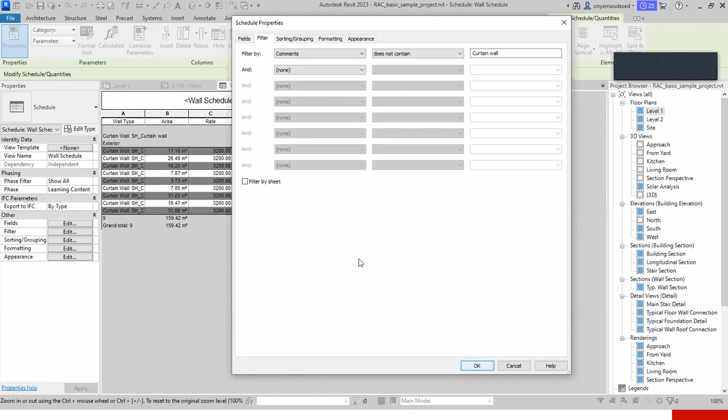So now you see that it has filtered off the curtain walls in my project. So these are now actual walls, because that is more like glazing. You can see now that we've applied the filter. And now, because of that comment, okay, let's go back. If I go back to my formatting, and I click on comments now, and I unhide it.

It was hidden, it was a hidden field before. If I unhide it now, see that it's just a blank column. I've used it for what I want to use it for, but it's not useful anymore as a column on this field. So that's where you can now hide. I don't even have to go back here. You can also click on a column and then come here and hide. It's the same thing.

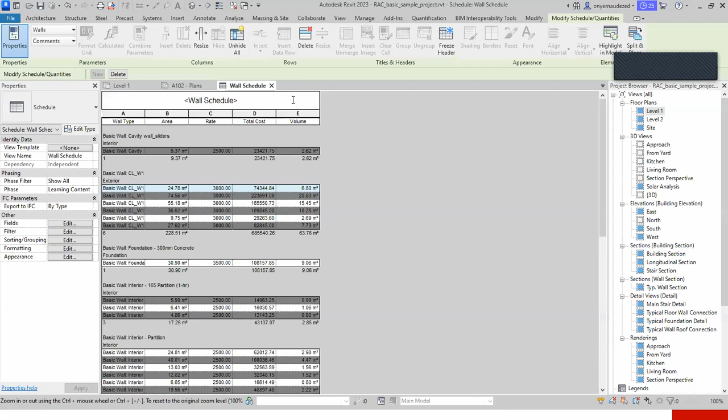So which brings me to some of the things that you see here. There are a couple of other things you can also do. One of the interesting things is that in this header part of your schedule, you can customize the schedule to add your company logo and other information that you want. You can't do that in the place that has parametric information, which is automatically updated. But in this header part, Revit allows you to do a couple of other things.

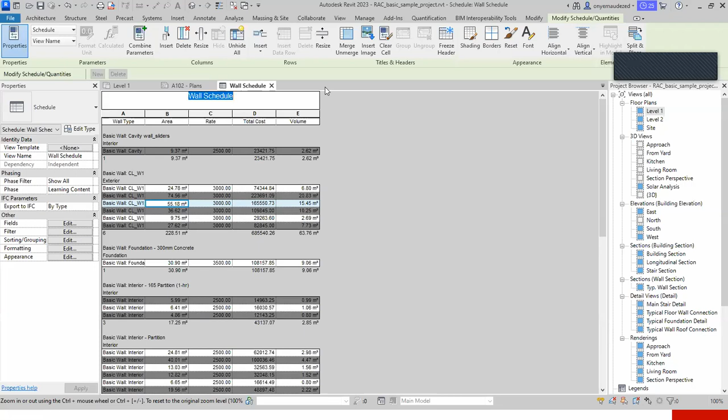So when you are within this area, if you check the columns and the rows, you can insert things. For example, I can insert a row below the selected one. Now Revit has added a blank row where I can begin to add other things. These are not parametric information that automatically updates, but it allows you to add more things. For example, from this category I can begin to add project information, such as the client of this project. These are things you might want to add on your schedule. Let's say I add NIQS, for example, that's the client.

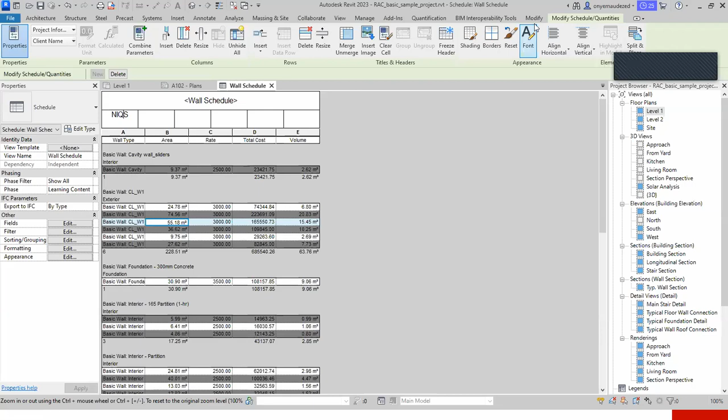The interesting thing now is that this is not just typed here for this schedule. If you go back to the Manage tab and check Project Information, this is where the information is coming from. You notice that what I just typed has updated. The client name has changed to NIQS. So this is the way Revit works. You're not working in a schedule. You're working in a BIM model that is bidirectional. Anything you change somewhere updates everywhere. If I come here and change this to, let's say, NIQS Abuja, it will update on the schedule.

And in this place, because these are not parametric information, I can even merge cells. I can select these two cells, and if I go back to Modify Schedule/Quantities, I can merge and unmerge. If I click on this, these two become one. Let's say for NIQS Abuja, I can unmerge this and merge these two instead. So you see that it reads properly.

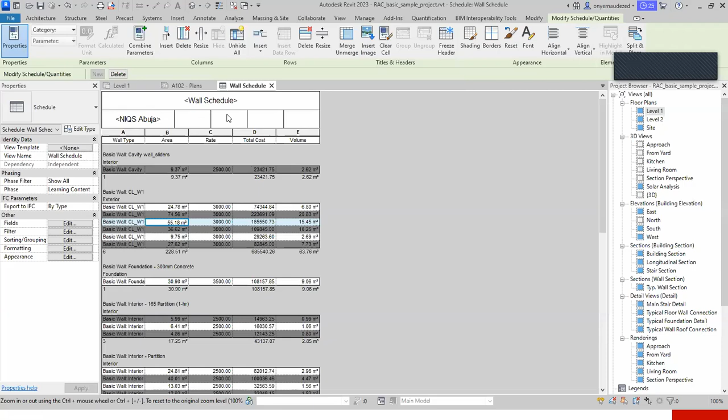You can even add a logo. If I come here, you can see Insert Image. If I have the NIQS logo, once I click Insert Image, it will let me search for the image, import it, and add it to your schedule. So imagine when someone looks at the schedule, they can see the client name, the company information, maybe the project address and all those things. All those things can come from project information.

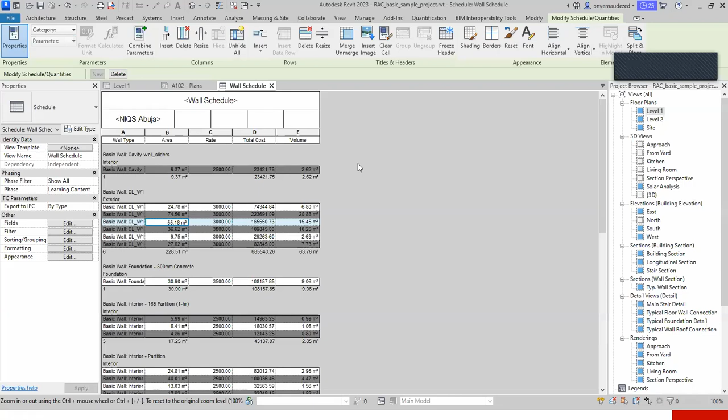For example, we have project address, and even the ones that are not there by default, you can add them using the add parameter feature that I talked about earlier. So you can populate all these, just like an Excel sheet. The parameters here are now behaving like Excel. I can change the color. For example, I can put a shade and change this to red. And this is another thing, talking about the formatting we talked about earlier.

So if you look at this now, you see that none of these walls is up to 50 square meters. Okay, this one is up to 50. Let me check the conditional formatting that I did. Conditional format, area, 50.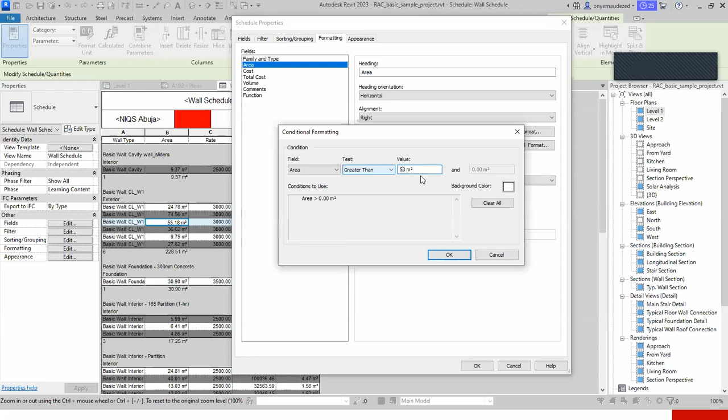Yes, so I wanted to show the conditional formats I was talking about at that time. So what I now highlighted here, you can see that these cells that are shown in red are walls whose area is more than 50 square meters. So for me to do that, what I did is go to the formatting tab.

If you click on that particular parameter, which is area, you can go to conditional formats, and you can see what I just said is a condition saying that if the area is greater than 50 square meters, change the background color to red. So that's the way. Once I look at this schedule now, any cell that is showing red tells me that the area of that wall is more than 50 square meters. So this is where conditional formatting comes in.

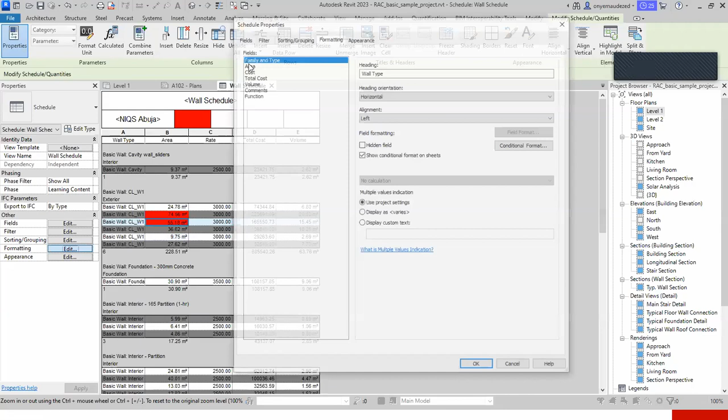So basically up here, you can do a couple of other things. Some of those things we've already seen before, like the units, like we did for area, two decimal places for the area, or the calculated parameter, combine parameter. And then up here, you can also insert a column. If you want to insert a column, that's basically

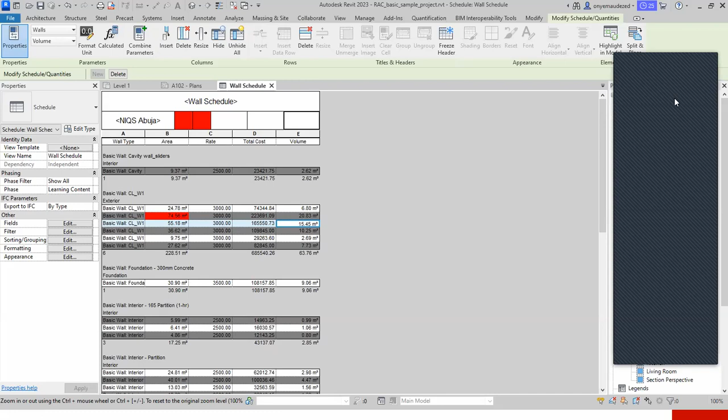If, for example, you want to see all these parameters from a floor plan, not necessarily from a schedule, you can also see them. If you click on this wall, for example, you see some read-only information.

Hello, can you hear me?

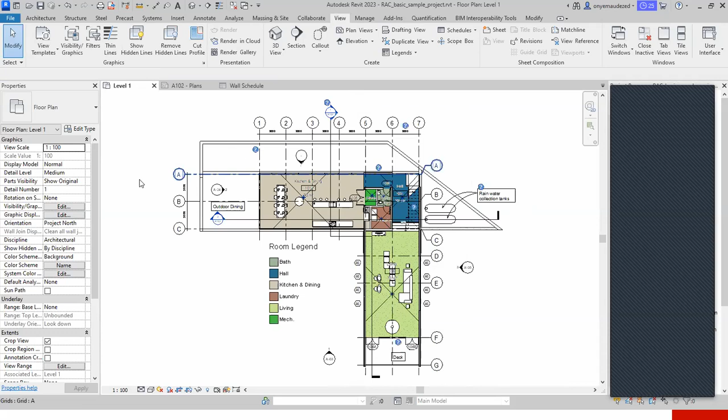Yes, just to summarize, one last thing you also need to know is that for some of these parameters listed here, you don't have to create a schedule. If you just want to know the information, you can still go back to a graphical view like a floor plan. When you click on a particular element, you see some read-only information.

So if you come to dimensions here, you see the length of this wall is read-only, you cannot change it. You can see the area, you can see the volume. So this is actually the information that Revit is extracting and showing you on a schedule. You can also see the height of the wall. Some of those things are read-only, you can't change them. Then on a schedule, Revit will populate all those things and put them in a spreadsheet format. So this is basically the same workflow.

If time permits, I might still show... someone's mic is on. I don't know who that is. Okay. Please kindly mute your mic.

So at this point in time, I will allow you guys to throw in any questions that you have. After the questions, if we have time, I might still show how to do a room schedule, because that allows you to embed a schedule into another schedule, which is the embedded schedule I talked about. So if you have any question at this point, feel free to either type it as a comment or unmute your mic and ask a question.

Let me also say something. The quality of schedule you produce is a function of the details you have in the model. So generally, before you start to work on a particular model, you have to check the level of information contained in that model. There's a software called Solibri Checker. If you apply the Solibri Checker, you'll be able to know the quantum of information you have in the model. The more information you have in the model, the more you can achieve in generating your schedule.

And as you can see, this BIM software is developed by an American company called Autodesk. So you find that even to generate quantities, unless you go to schedule, the thing is hidden. Why did they not say bill of quantities there? Because in the US, they have what you call cost engineers, not necessarily quantity surveyors. So as quantity surveyors, we want people to know this is only an introduction. You can't learn everything about BIM in 2 hours.

Hello? Yes, can you hear me now? Okay.

Yes, sorry, the network. So I wanted to say that even if you don't take anything away from everything I've said, and I know that I said a lot of things, you also know that to generate quantities or create a schedule in Revit, when you get a BIM model, ideally you're not the one to even create the model. You are basically adding information to the BIM model.

If you go to the View tab, you go to the Create panel, then you click on the Schedules drop down. Most of the time, you'll be creating Schedule/Quantities or Material Takeoff. For both of them, the interface is the same. If you click on Schedule/Quantities, you now select the category of elements you want. If you want to generate a wall schedule, you choose wall. If you want to generate a window schedule, you choose window. If you want a floor, roof, whatever kind of schedule, you choose that category.

Depending on the category that you choose, for example, if I choose window now, the parameters I will see here are a bit different from what I saw when I created the wall schedule. So this is now the parameter. I understand that the workflow is different from what the typical quantity surveyor is used to. That's why it sounds abstract. But once you understand that you are basically extracting information from a BIM model, and what you see here are the parameters in that BIM model, which is what you have here under fields.

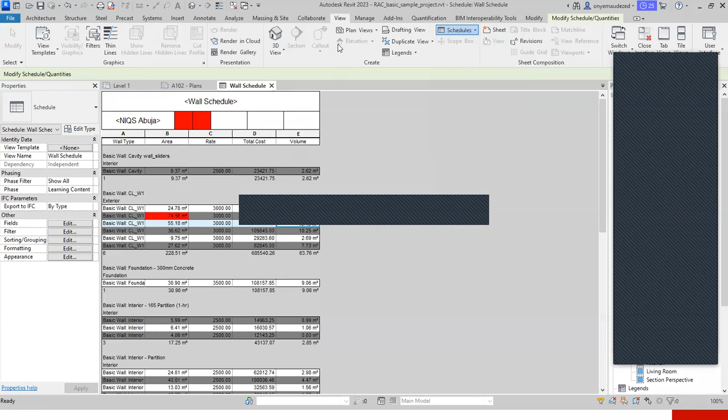Every other thing here is like working in Excel. Do you want to filter off some things? How do you want to arrange that information? How do you want them to show up on your schedule? How do you want the final schedule to look? The important thing is understanding that this is information from the model that you've received, and you are extracting that information and putting it in a spreadsheet format. And like I showed earlier, sometimes you might still have to open the model itself and add that information if it is not there yet.

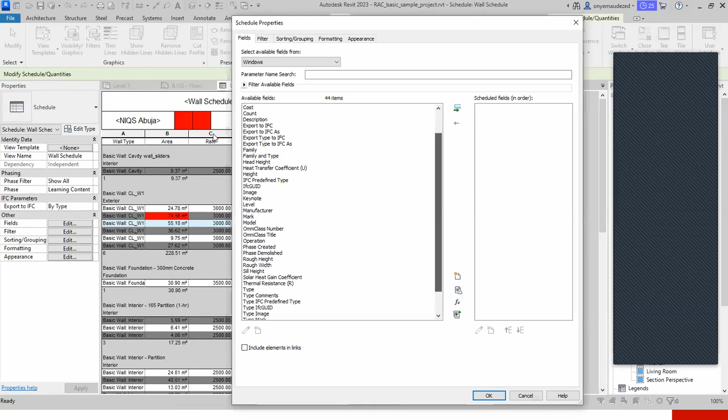For example, this furniture arrangement that I have here, if I want to create a schedule for it and I don't have the manufacturer information on this, as a quantity surveyor, you might have to add that information yourself. If you go to Identity Data, you see Manufacturer. Like Dr. Sam mentioned, in those other countries, you're basically a cost manager. So you get a model and you begin to add that information. The more information you add into this model, the more you're able to extract using a schedule.

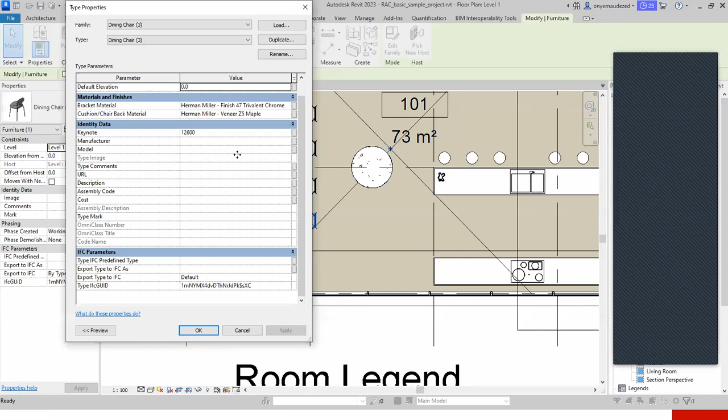So if you now go to the View tab, you say Schedule/Quantities, you choose the category and the parameters that you want to extract. That's basically the summary of the entire workflow. But I don't expect that if you're not used to Revit environments, you'd understand Revit in 2 hours. Revit is a cumbersome software. I've been using Revit for about 10 years, and I did not learn Revit in 2 hours. That's the truth. It takes experience, it takes practice before you actually grasp it.

So I'm not surprised that people say they're not following or they didn't grasp most of the things I said, but it's recorded. If you're able to go through the video and watch it, and more importantly practice it and follow the step-by-step process on 1 or 2 small projects, it will begin to make sense. And interestingly, if you possess the skill now, you kind of stand out from most other quantity surveyors, because a lot of quantity surveyors are not used to the Revit environment. They don't know how it works. And it's not just in Nigeria, it's a skill that is needed globally.